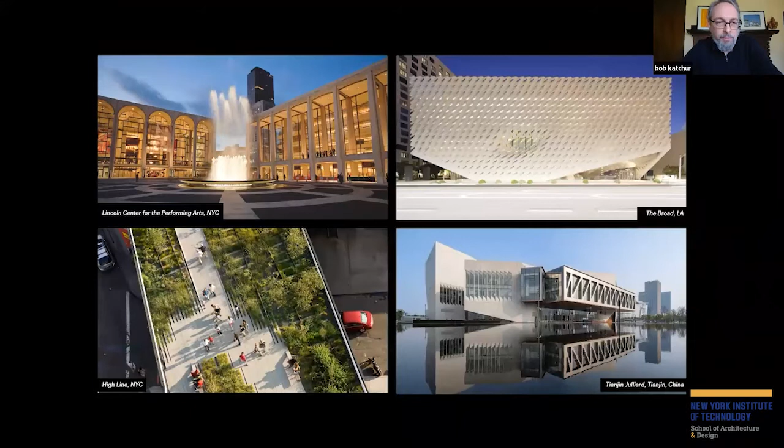We're the architects and design architects for the Lincoln Center for the Performing Arts redevelopment, the Broad, the High Line, and more recently we've expanded, working internationally, and there's a project there in Tianjin, Juilliard School, but even projects in Moscow and in Europe. There are our principals, our partners there.

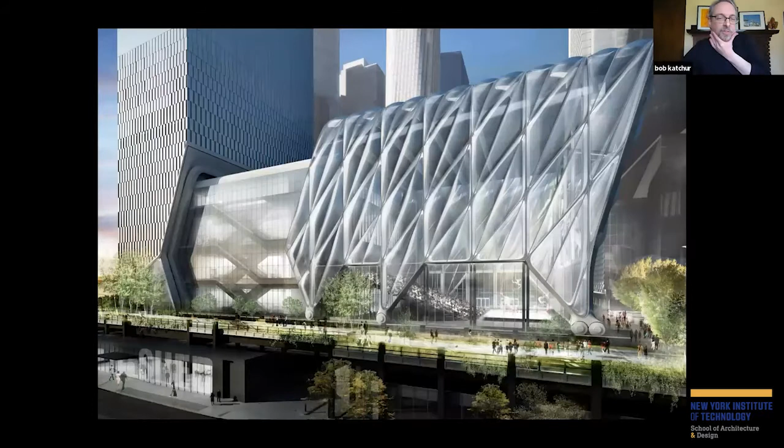So the Shed really began with the city, as they negotiated with the MTA and the future developers of Hudson Yards, they recognized a need to reserve space for a community center or cultural use. But they were able to secure a footprint that is effectively the size of what we call the fixed building. And in this presentation, I'll refer to this component in the middle here as the fixed building, the movable shed, and then the adjacent tower that ultimately we were, I'll call it, strongly encouraged to connect into.

So the city was able to secure this sort of 20,000 square foot footprint in the larger eastern rail yards. And it's situated in a very strategic position along the northern edge of the High Line, the Whitney Museum at the south and the Chelsea Arts District in between, and the expansion of the theater district into the far west side, the redevelopment of Javits and other projects over here really left the Shed in an important urban site.

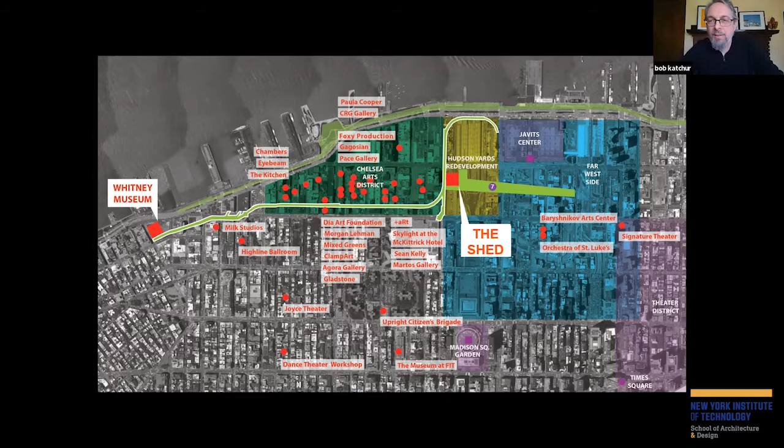I think the question the city had was, what should it be? There are over 1,200 cultural institutions in the city. Why do we need one more? What are we missing? What do we need? And ultimately, they put out an RFP answering those questions with some parameters. And I think they really expected to get folks like the Guggenheim or MoMA or the Whitney or the Met to respond with a team of architects and a proposal. But the economy was collapsing as that idea was put forth, in 2007 and 8. And those institutions were watching their endowments dwindle and their expansion ideas suffer.

In the meantime, Liz Diller and David Rockwell, Rockwell Group was our collaborator on this, thought about what do we need, what can we do? And they were sort of informed by a process that happened just after 9/11. There was an aching need to do something down there at the Ground Zero site, and they set about finding a way to create a ramp that would allow people to see the Ground Zero site. And there was no client. They sort of endeavored on it themselves, pulling resources from wherever they could, communicating with city officials and other supporters who might support it.

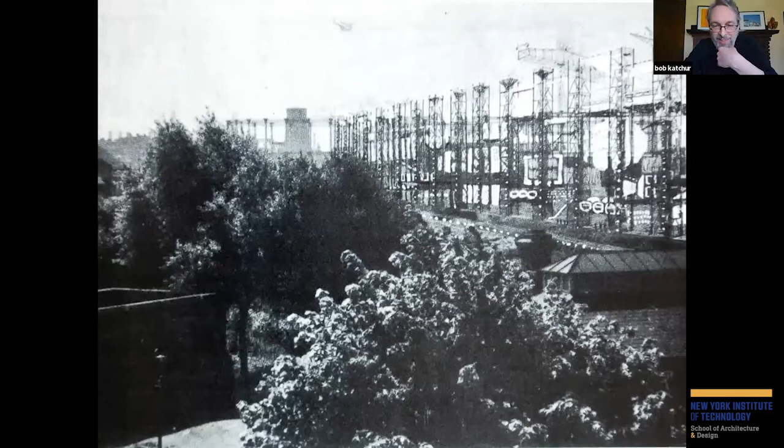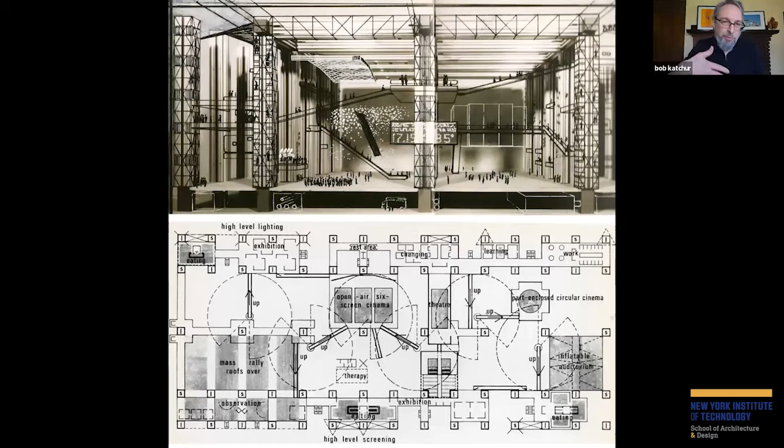And we knew that there was a significant movement toward multidisciplinary needs. Of those 1,200 institutions, very few of them actually try and merge the artistic silos that exist. So you mentioned Cedric Price. That was a clear example of creating an architecture of infrastructure that could be malleable to the needs. It was obviously never built, but it served as an inspiration, and I think it set off a trend in the cultural community with Pompidou and other institutions that attempted to make it good, make it real.

The site here at Hudson Yards, this is before the Eastern Rail Yards was decked over. You can see the train lines sort of expanding out into the Western Rail Yards here in the foreground, the High Line at the southern edge, and sort of a train shed building for maintenance and other things in the Eastern Rail Yards, all were there, and they all had to operate during the entire construction process. And ultimately, the Eastern Rail Yards as a construction project, in large part controlled by Related, was one of the largest construction projects in US history. 13 million square feet, and then some as you move north. It was several thousand workers on the site every day.

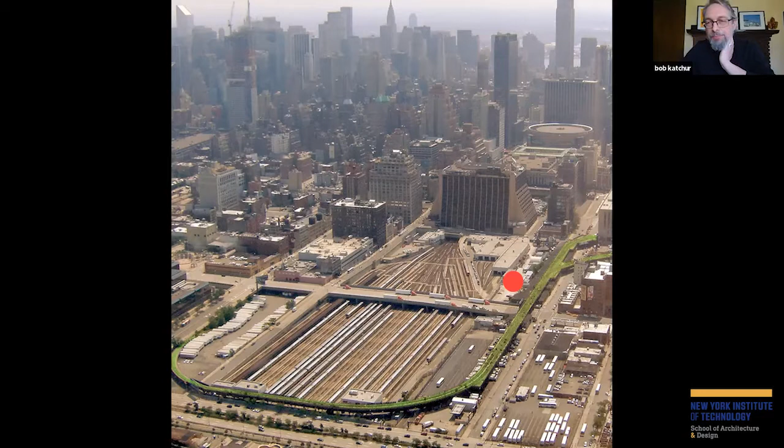So as they began to deck over the site, the Shed site is here on the right-hand side of the page. We had to act. We weren't necessarily in a position, we hadn't yet figured out who the Shed would be yet, but Related needed some definition. How much does this thing weigh? Where does it want to be? So we set about making some very early infrastructure decisions that we would have to live with as we move forward. And this is the whole of the Eastern Yards and the Western Yards, sort of on the lower left-hand corner.

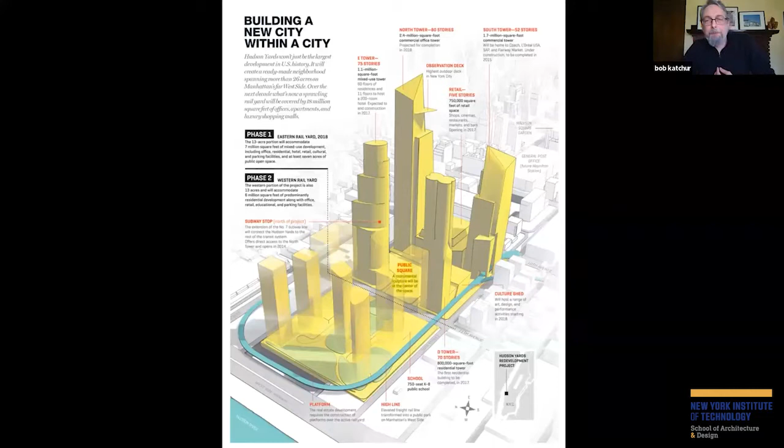And the way these things work, the alchemy between the MTA and New York City as the zoning regulator and Related, was that the city was really providing a series of amenities to the city, and Related and the MTA, as the landholder, were doing the commercial and residential development. So these things, the New York City subway line, the High Line, and the Shed, really added value to the whole neighborhood, but it was a way of humanizing this commercial development and making it for the public.

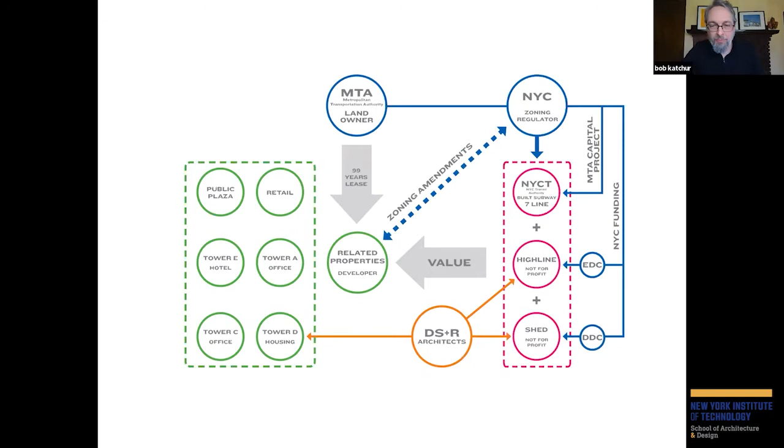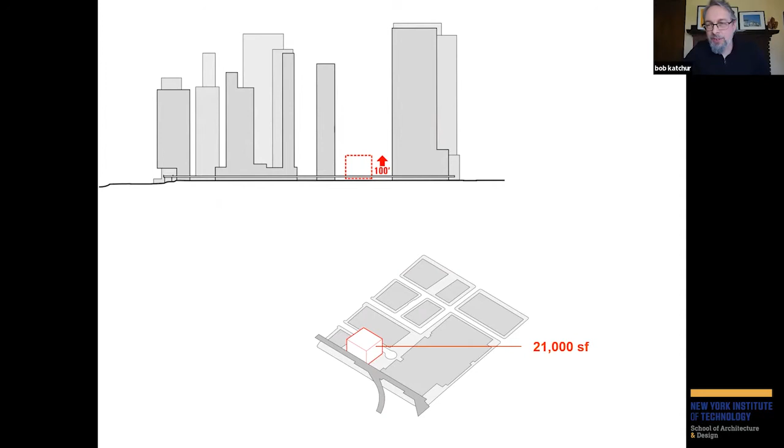So I mentioned the sort of 21,000 square foot footprint that was originally allocated with some sort of limit on the volume that it could be. It had a 200,000 square foot maximum square footage allowance in an agreement between the city and the MTA. So we set about creating multiple proposals, pitch books, and a business plan. Ultimately, we pitched it to the city, and Mayor Bloomberg said, "I really like this idea." We were slotted a 20-minute meeting, and we were there for an hour and a half. And he loved the idea very much, but he wanted it to balance its books. He wanted it to be a stable economic thing. So we set about creating that.

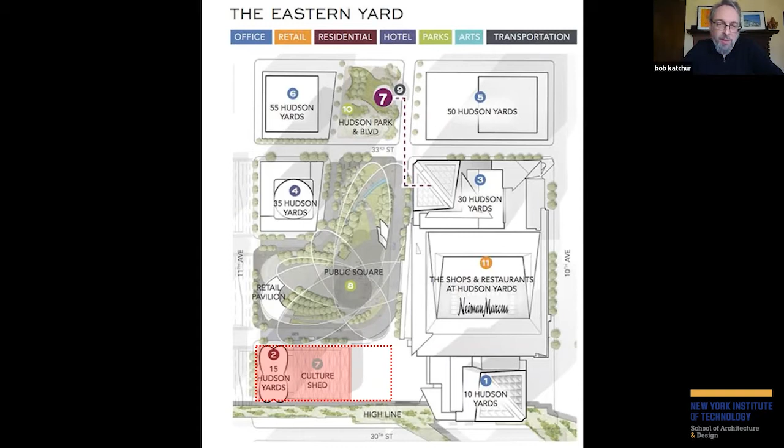We looked at ways we could develop cultural programming overlapping with income generating events so that the books could be balanced. And ultimately, a serious attempt to make sure that Hudson Yards at large had a connection to the Chelsea neighborhood. And that's why the entrance is on 30th Street and not up on the public space to the north. We wanted it to be part of the neighborhood.

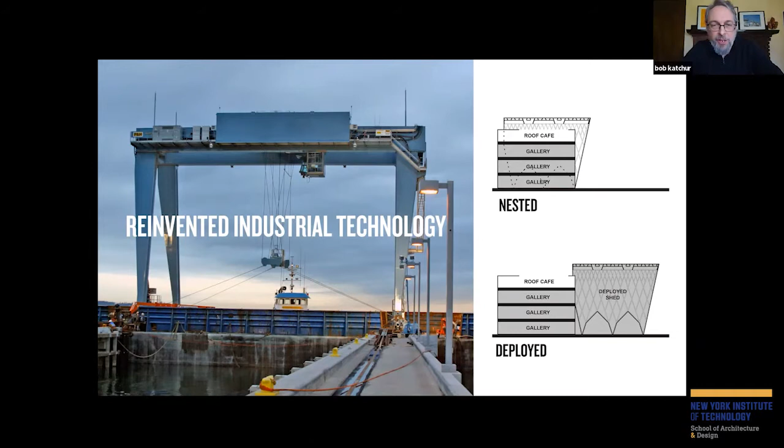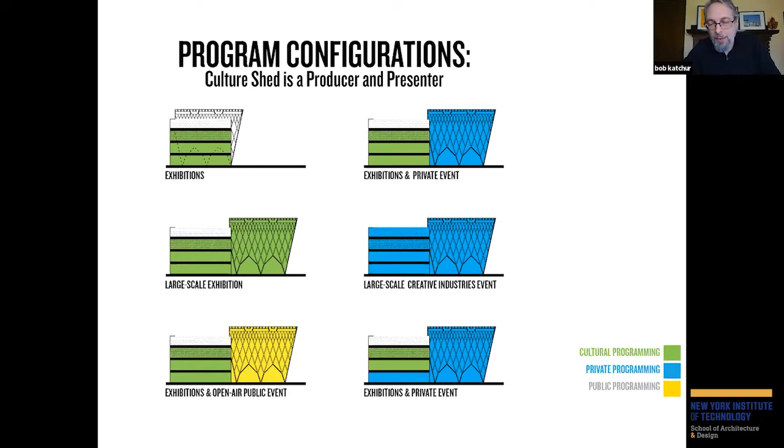So we use the terms nested and deployed. And as Tom mentioned, it's really based in a reinvented industrial technology. We wanted something that was entirely reliable, entirely understood, that it wasn't going to be a total invention, even though it's incredibly unique for a building to utilize this technology. And we envisioned different programming configurations that would allow these different cultural programming, private programming, and public programming. And different parts of the building could be taken over by any one of these programming configurations to make the income generating side of it be balanced out with the public mission.

So something I'll mention is the way it connects into the adjacent residential tower. Originally, it was designed with a 50-foot gap in between, but as the development matured, that building kept getting wider and bigger, and the positioning of everything began to get a little too close for comfort. And ultimately, we were faced with the decision, is it better to connect or not?

And one of the considerations was that this was a cultural institution on sovereign city land. It wasn't part of the development formally. It wasn't controlled by Related, and we didn't even want it to have that appearance. But there was a real benefit in how we approached this, that we could gain additional support space for it. And ultimately, it became a need to do that.

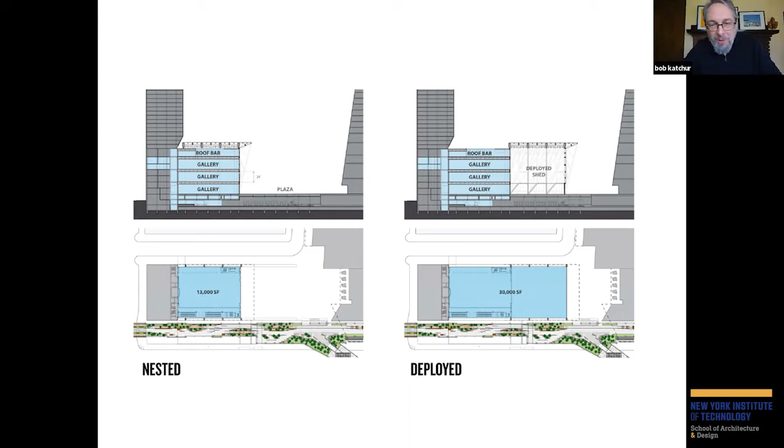And it really occupies the lower 10 floors of space. We were able to utilize that footprint, which was not desirable space from Related's perspective at the base of the building, to put all of the mechanicals for the shed, all of the dressing rooms, all of the public bathrooms, all of the things that allowed us to preserve the 21,000 square feet for public space.

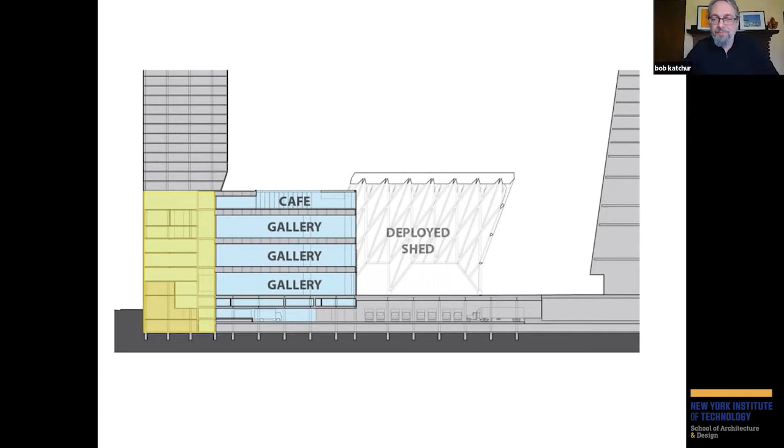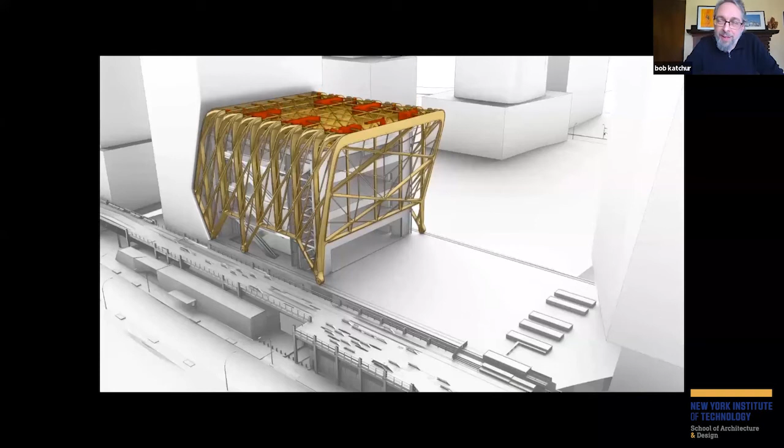So this is an animation that we assembled, and I'll show you the greening of the High Line, the taking over of the yards. The steel frame of the fixed building, which is on that 21,000 square foot footprint. The engagement of the tower. And then the steel structural frame of the movable shed itself, with a full mechanical system that allows us to climate control that room when it's deployed, and the ETFE skin.

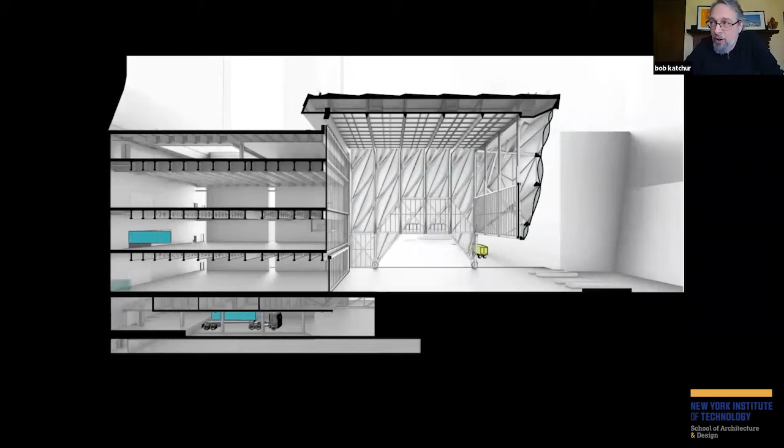So one of the things that was incredibly important for the project was the ease with which you can load in and load out. It often becomes a make or break moment for institutions. They spend a lot of money moving things around, and the easier that you can make it, the lower the cost of entry for a given theatrical or artistic company to put on a show there.

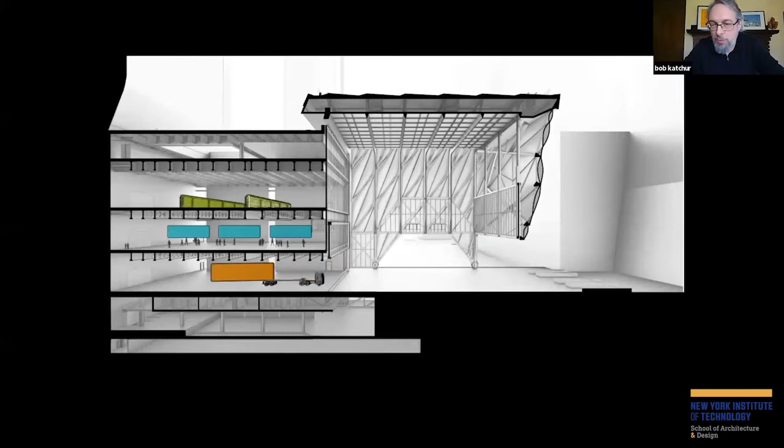And as the shed became real, and Poots came on board, and a board was developed to build the institution, Alex made a decision to produce all new work, which made these things all the more important on how you get things staged into the building and how much it costs to do it. So we have a variety of ways that goods and materials can be loaded into the building so that things can happen simultaneously.

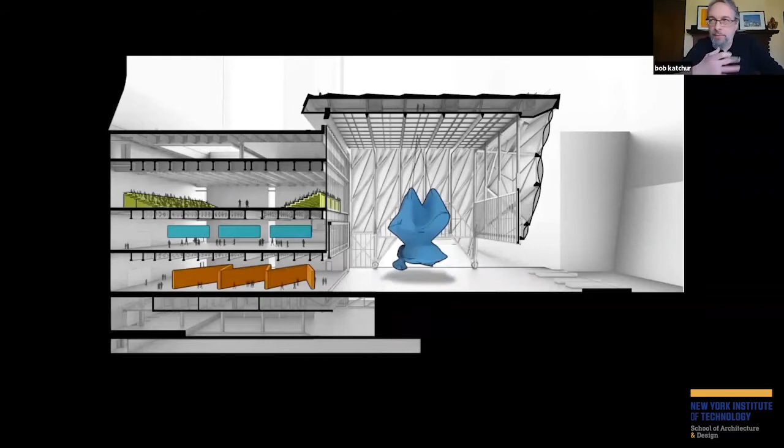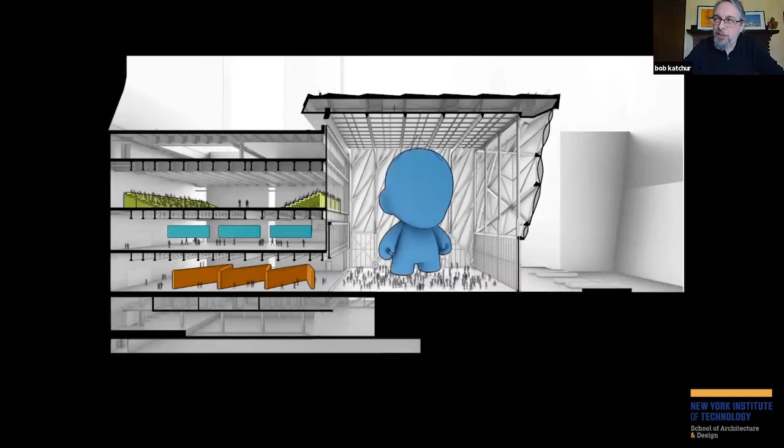We have a theatrical deck at the top of the building that allows you to easily rig whatever you need to in the main space. And we have a lot of automated systems that allow you to transform the building from one state to another.

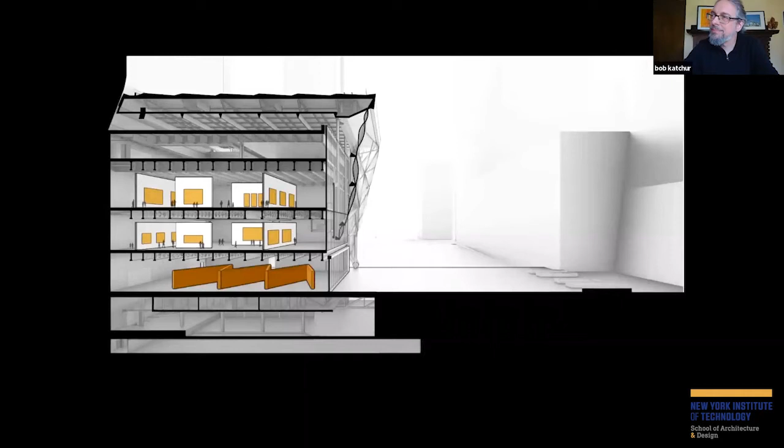I think, for the sake of time, I'm going to move on. I want to leave enough time to have a conversation. I thought I would mention, flexibility is key to the building's success, and we really viewed the architecture as one of infrastructure, offering what you would need 80% of the time with great ease.

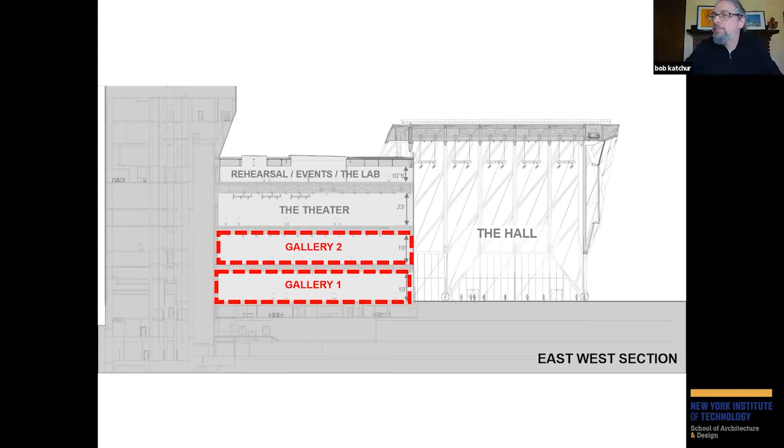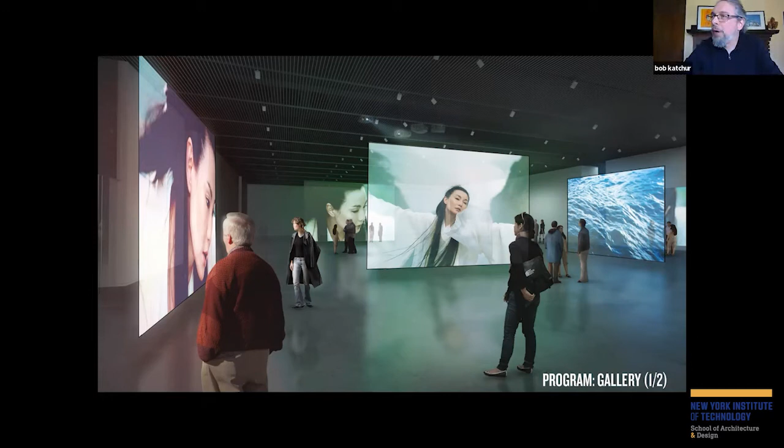So in the exhibition galleries, which were designed to be flexible between very light-filled modes and darkened room modes. This is the Reich Richter Pärt, which was the first show that the shed launched in its inaugural year. And it was a mix of music and painting and singing. And so the galleries are all very flexibly designed.

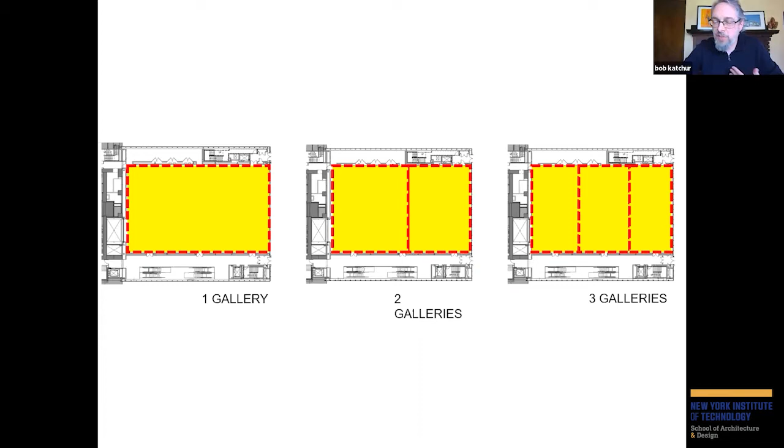You can demise them both mechanically and spatially into a series of smaller spaces so that you can create intimacy where you need to create intimacy. There's distributed power in the floor and in the ceiling. The walls can carry 440 pounds of weight around the perimeter. And there's anchors in the floor every 10 feet to permit any number of arrangements of walls that you might want to create for a given show.

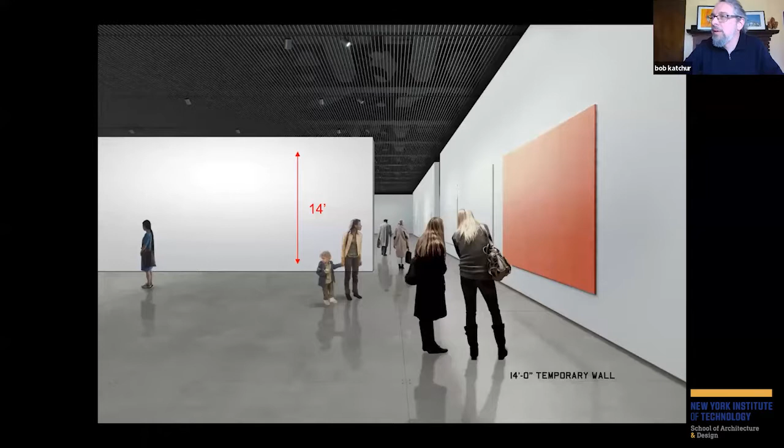And those anchors are strong enough to support cantilevered walls that are thin in nature, between 14 and 18 feet tall, and still meet code and carry the art on them as needed. And indeed, the shed has done all of those things in the years since it's been opened. That was from the Agnes Denes show.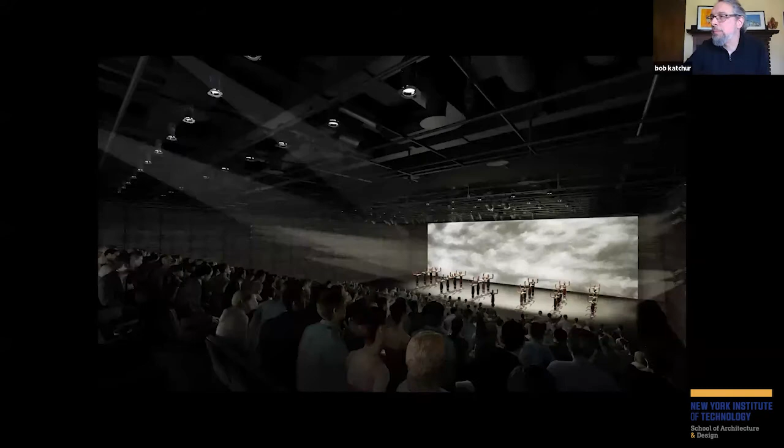The theater up on level 6 is a black box theater that can have 500 seats in an arrangement facing a singular stage, or it can be set up into 2 separate rooms that have smaller, more intimate arrangements.

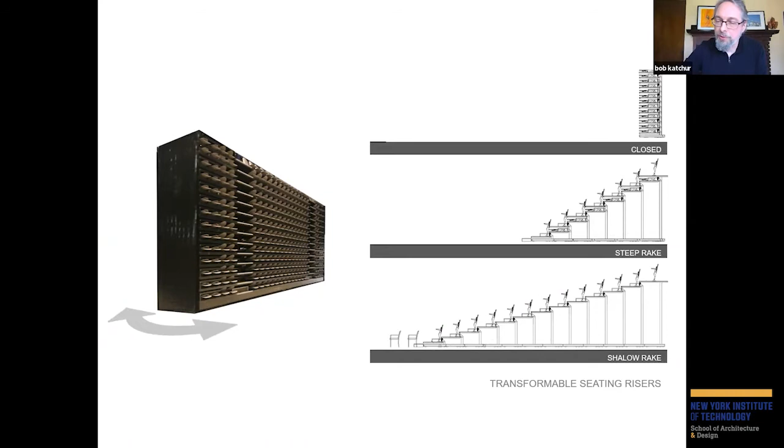And the shed has got a series of flexible seating wagons that can be stored within the base of the tower, that can, when they're closed, roll down a hallway, and then alternatively create steep rakes or shallow rakes. And here's the 500 seat arrangement.

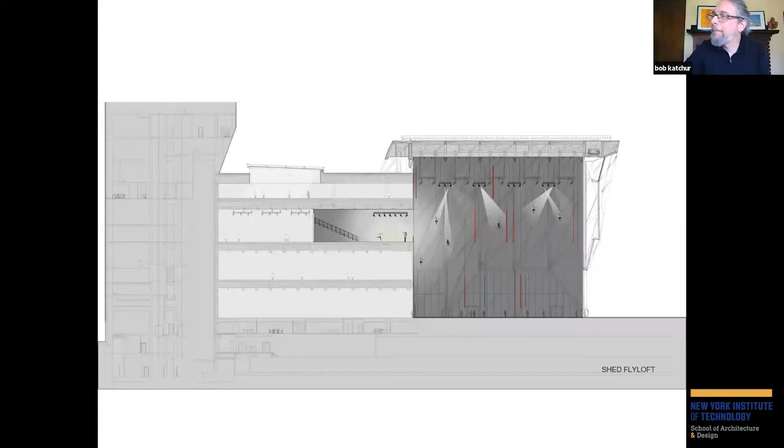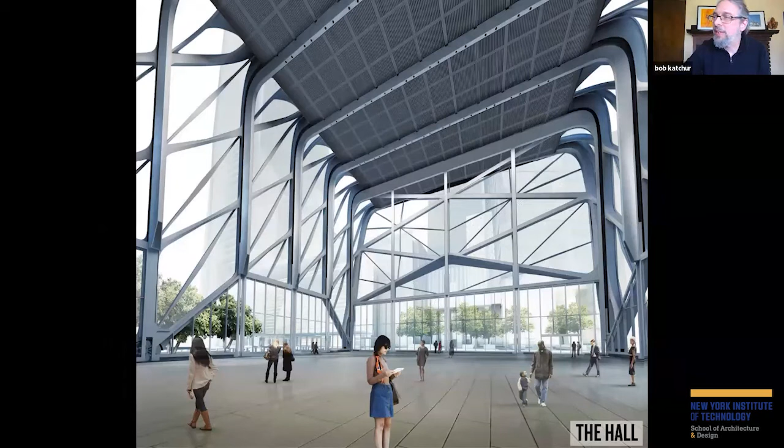And each of these spaces has been designed to connect into the main space. So you could have a show where, you know, you're in the black box theater, but you use the McCourt as a deep well of space. The McCourt itself is about 115 feet tall inside, with that theatrical grid above. We envisioned it serving a variety of purposes. The frame itself is sort of, we like to call it all muscle, no fat.

These are the air delivery systems, the ductwork coming down. It's married up, it's constructed out of steel the same way that the structure is. And it allows air to be delivered down low in the space, and the rigging systems are all up high in the space. So there's space up there to maneuver around chain motors and hoists and theatrical flies as you need to. The floor is loaded with power and data and convenience power, as well as loading capacity.

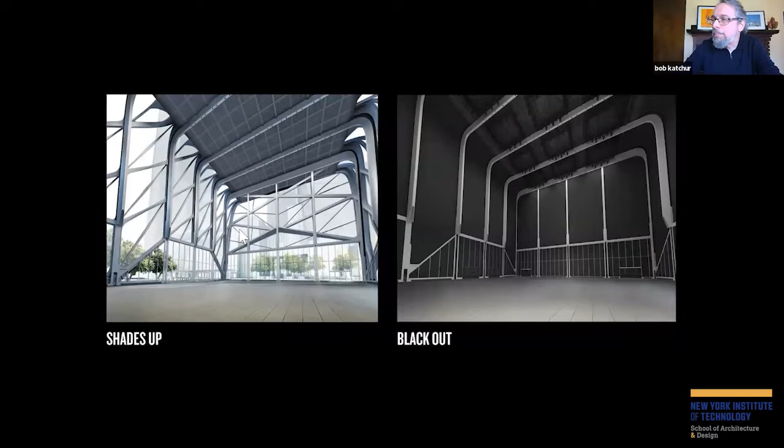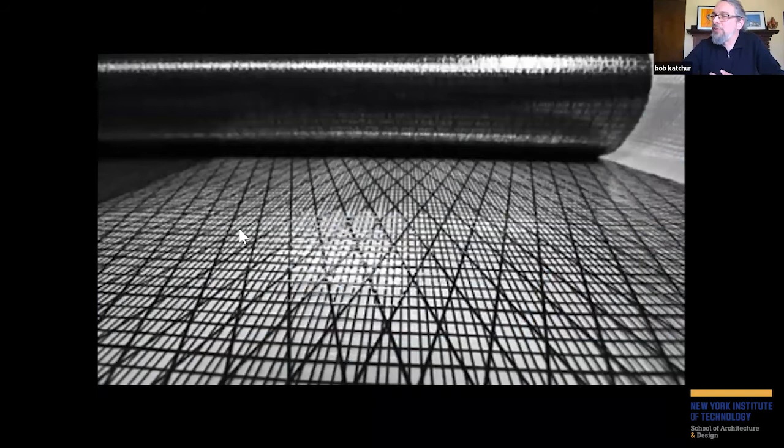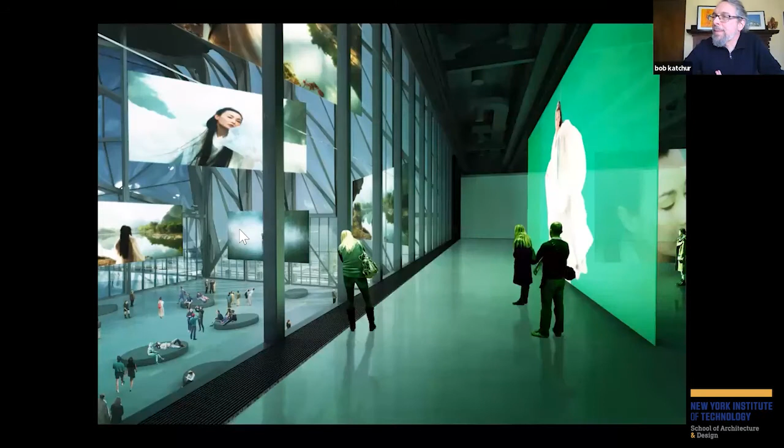And then the room can be blacked out with a robust heavy shade system that blocks out light and sound. It's based on a sailing system that's used to unfurl large format sailboats with a carbon fiber sail material, which is loaded with weight and which can control and isolate sound. And then the way we connect the fixed building and the McCourt, allowing for an interaction between those different spaces.

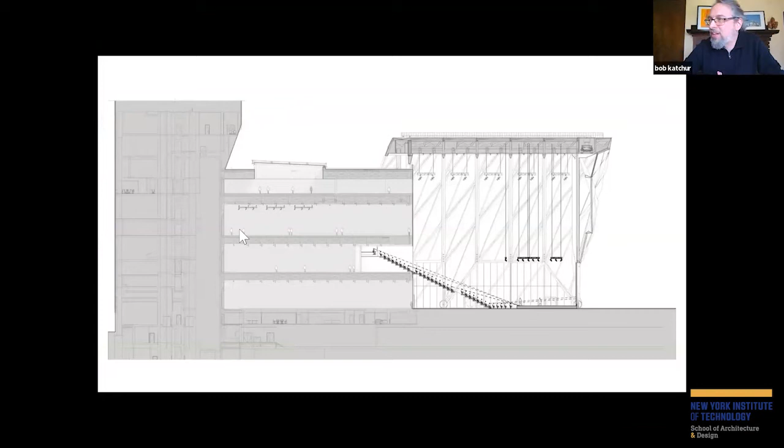So, Fashion Week was a primary driver in the considerations in the Shed, and they often have overlooks and booths and party rooms that overlook the shows down below. So a variety of different seating arrangements can be installed. You can create a balcony on the second level gallery, or you can create an event with a standing room only sort of floor space.

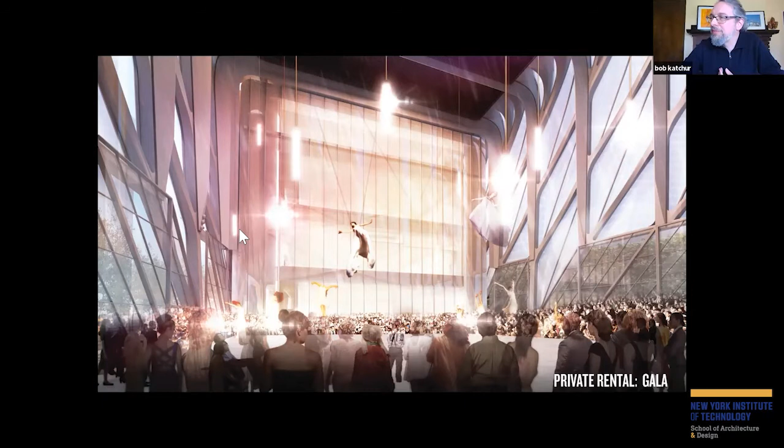And this was the opening show called Soundtrack of America. The second show was Björk, and there was a Chinese opera that took advantage of the space and flew people high up into the room.

So I see that I'm probably 20 minutes in. Tom, why don't you tell me, I've got some technical material, but we can... Absolutely fine. Please take the time. You want me to keep going? Please take the time. Okay. Yeah, sure. Okay. Thanks.

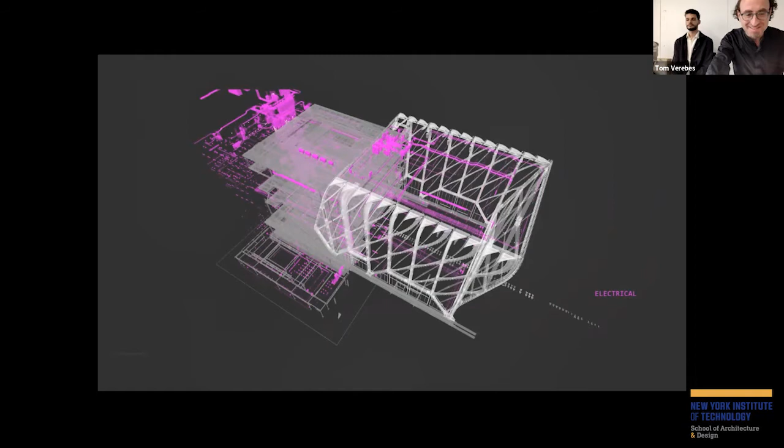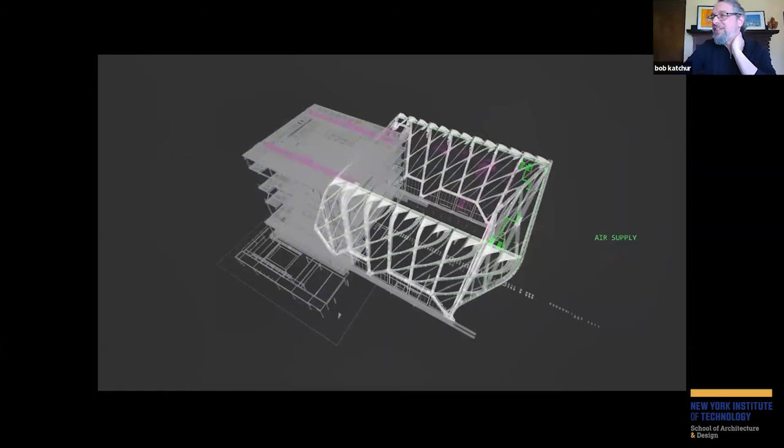So when we think about the infrastructure, we did this animation that sort of overlaid all of the different systems, rudimentary systems as well as sophisticated ones, the plumbing, the electrical, the mechanical, the air distribution for the facade systems, the ETFE, the kinetic systems, and then all the things that really control all of those. The degree of coordination and getting all of that stuff to synchronize and work together was maybe one of the hardest parts of the project.

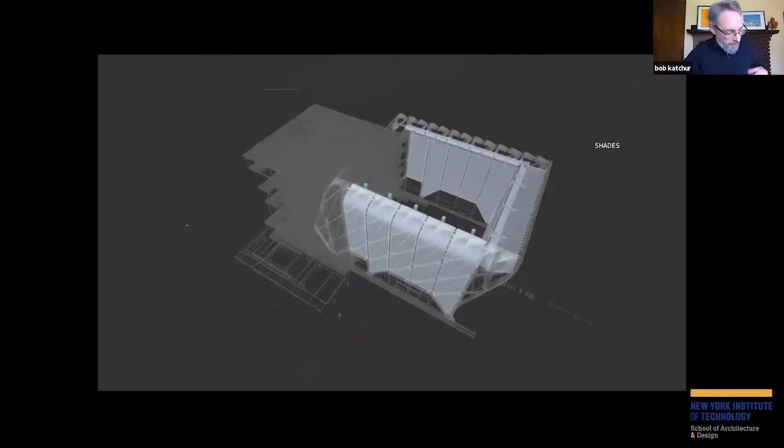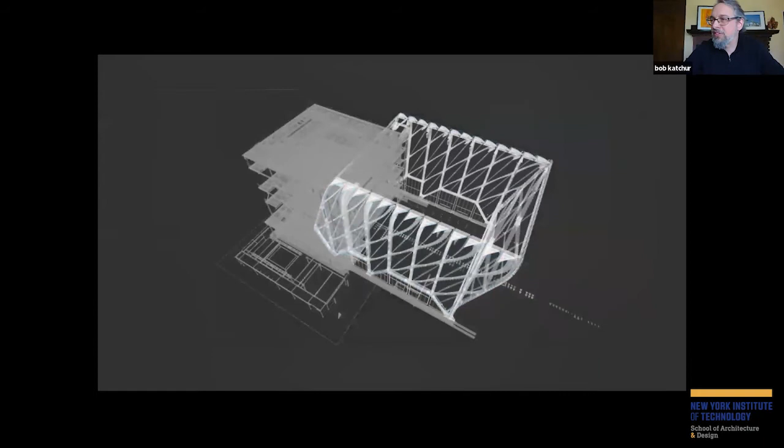And the project has a lot of programmatic aspirations, but I would say that equally difficult in execution was making sure that all of these systems came together technically to live amongst one another and be there when the artists need them. Because the end goal of all of this is to make it easy and accommodating to any artistic vision that people want to put into the building.

So when we undertook these designs, the geometry of the Shed arises out of these analyses of the structural needs. When you have a movable building that has to be entirely open on one side, looking at the lateral forces, the longitudinal forces, the gravity forces, the diagrid that is the structural expression is a response to that. And the diagrid allows all the structure to remain incredibly light, which is extraordinarily important to keeping the kinetic systems under control.

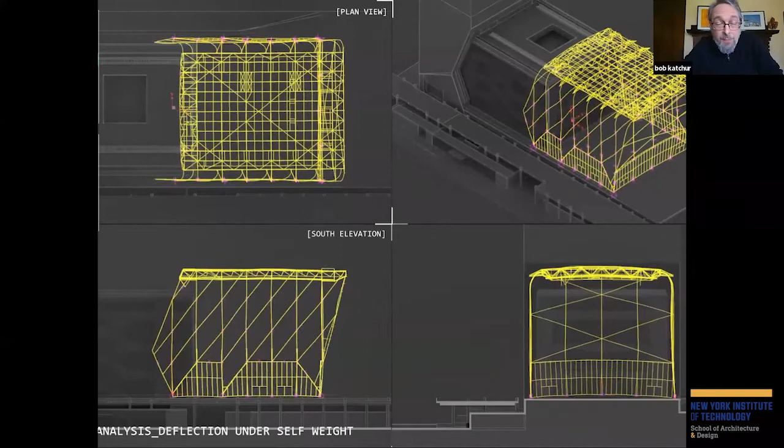The entire system is moved by about 180 horsepower of electric motors, simple electric motors. A Prius is about 160, 165 horsepower. So we're moving an 8 million pound building fully loaded with all the theatrical gear that they might put in it with an engine slightly bigger than a Prius.

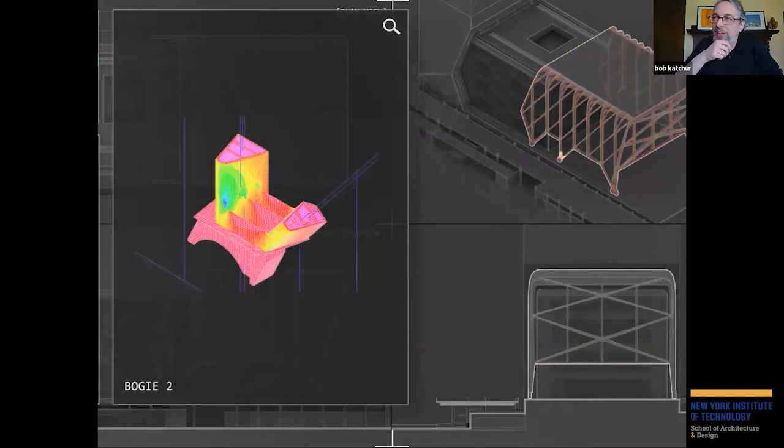So we assembled, with the help of Thornton Tomasetti, who are our structural engineers, and JB&B, our MEP engineers, some analytics that we put on display in a gallery opening in Germany a few years ago. So these are images from that presentation.

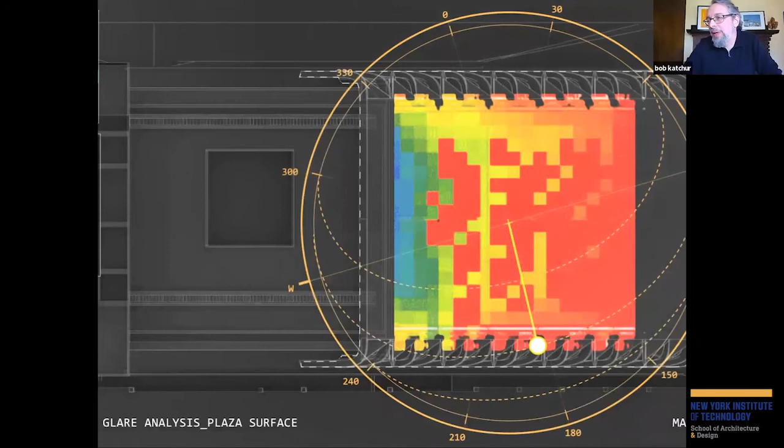And of course, life safety were big concerns as well. We looked at glare analyses, making sure that art could be displayed in the room comfortably. That influenced the frit selection on the ETFE itself. We wanted to soften the light, not let harsh sunlight come in.

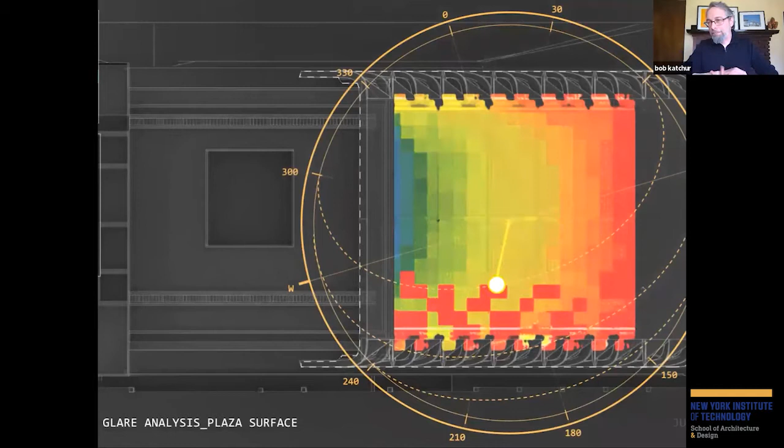We looked at, we'll let this play for just a second here and see if we can maybe move it along. This was an air distribution analysis that we did to make sure that we were conditioning the space down low, but not spending too much energy conditioning space where people couldn't be, up high in the space.

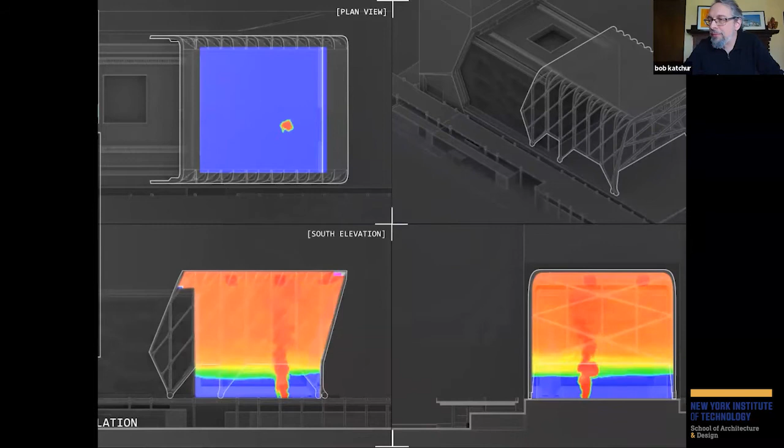And then, of course, life safety. If a fire happens in here, if they bring in a tractor trailer's worth of gear and something goes wrong, what happens? So, there's enough smoke evacuation in here to maintain a safe level of fresh air at the bottom of the room if something bad were to occur.

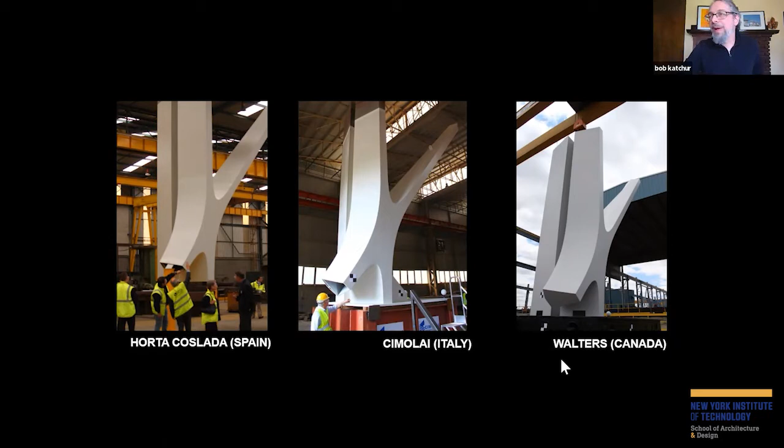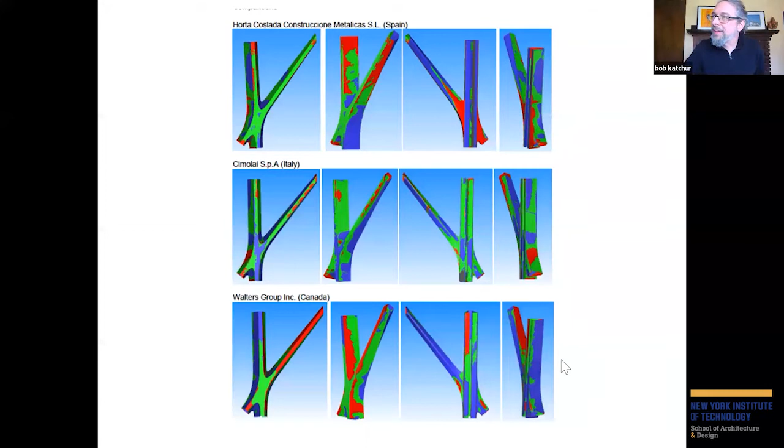So we set about making sure that we got the best steel contractors in the world because we knew how important the expression of the steel was. We asked them to do mock-ups in 3 different countries, in Canada, Italy, and in Spain. Ultimately, the Italians won. We analyzed each of them for deviations against the theoretical model. And the Italians did a terrific job; the company's named Cimolai, and they set about the project.

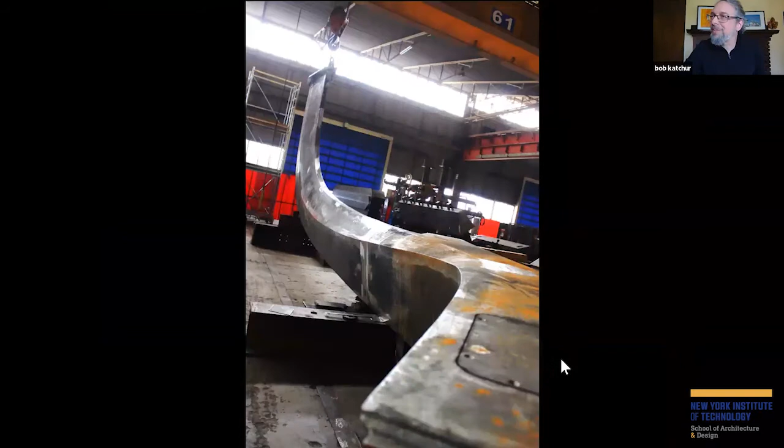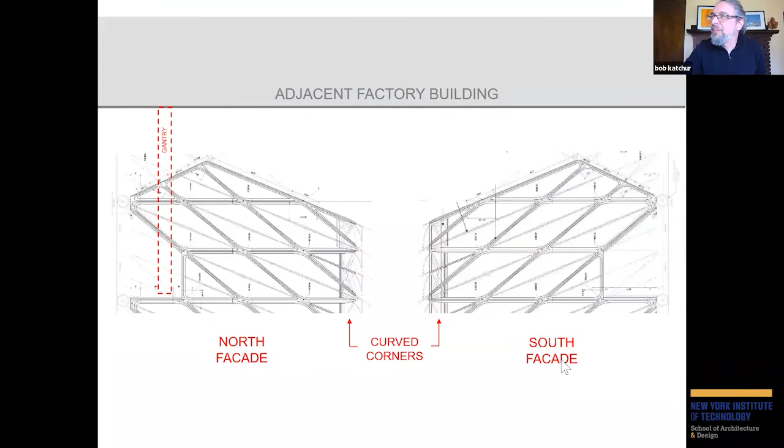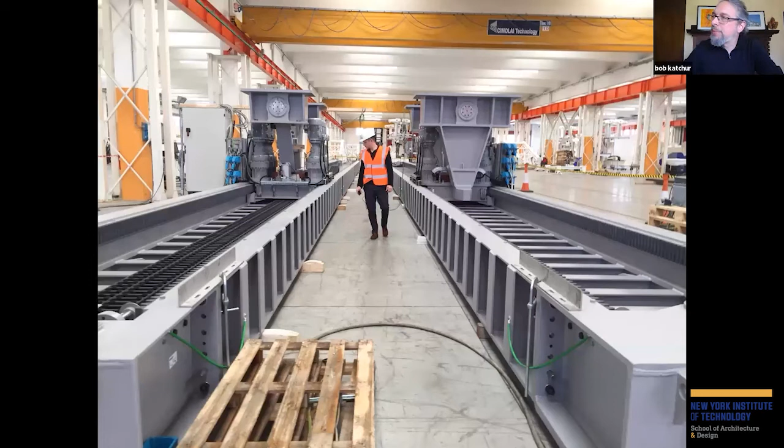And the kinetic systems, they also undertook the kinetic systems, which was really beneficial because the two needed to be in sync, the structure and the kinetic systems. And the way it works is these electric motors are on the roof of the fixed building, out of sight, out of touch. And it just drives along a rack and pinion system. And the wheels at the bottom are simple, dumb wheels. It's a little bit like a shopping cart where the motive force is up high and the wheels at the bottom just spin. These are the motors at the top, and they're now mounted on the fixed building roof.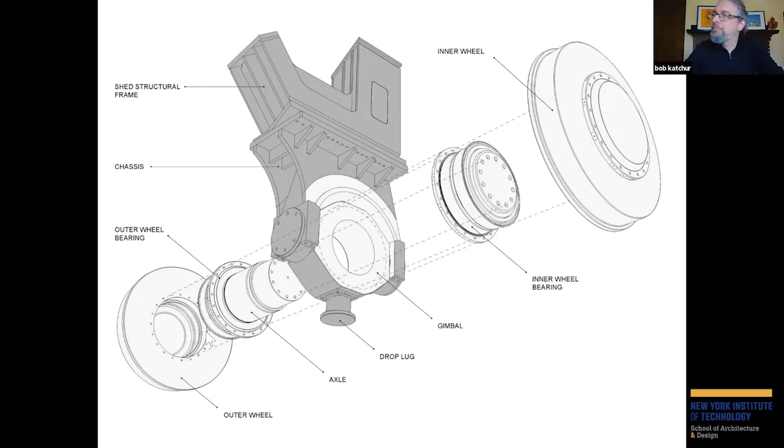Each of these motors are 15 horsepower motors. There's 12 of them. And that's the wheel. It has a special tapered bearing system in the center to reduce all friction. And that's what allows these motors to be so light gauge. So you have a bearing, you have an inner wheel and an outer wheel and an axle that was friction fit into the gimbal that connected to the structural frame. They superheated the gimbal and they super cooled the axle, slipped them together and allowed them to come back to temp.

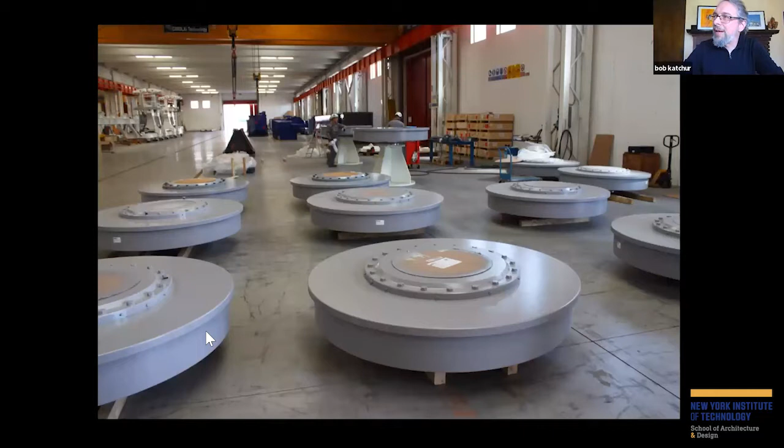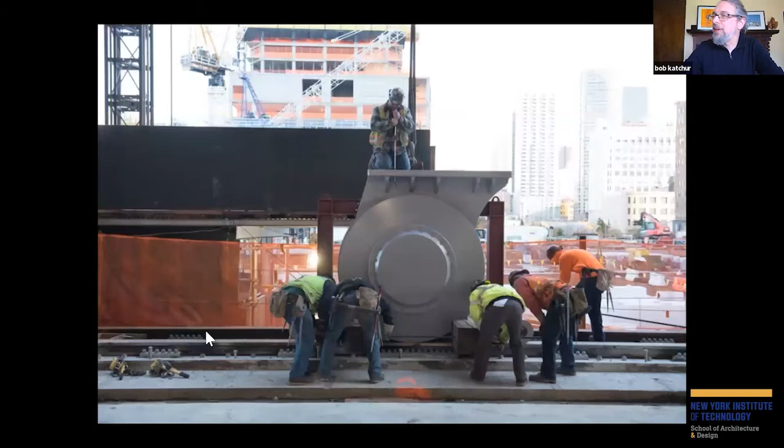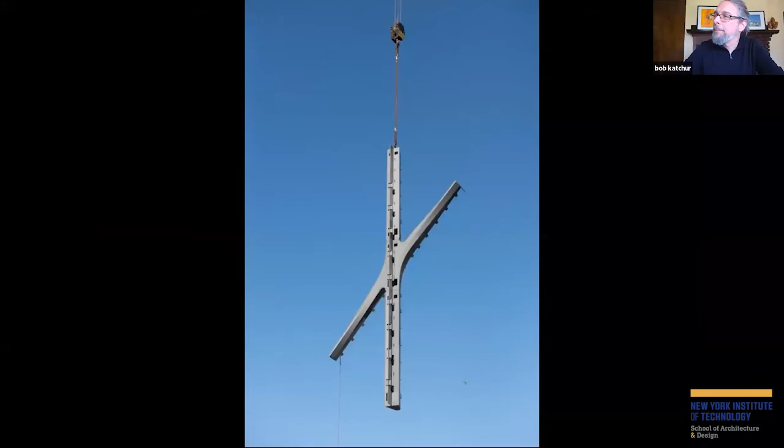I'm going to move through these very quickly, but it was pretty thrilling to see these pieces come together in the field. And now that it's all covered with ETFE, it's hard to imagine what it was. It was all staged against the fixed building. We used the fixed building as the scaffold structure to support the shed erection. The riggers had to figure out how to tip and fly these X-shaped pieces, and then they would just simply bolt together. And the bolts are internalized into the system so that you don't see them.

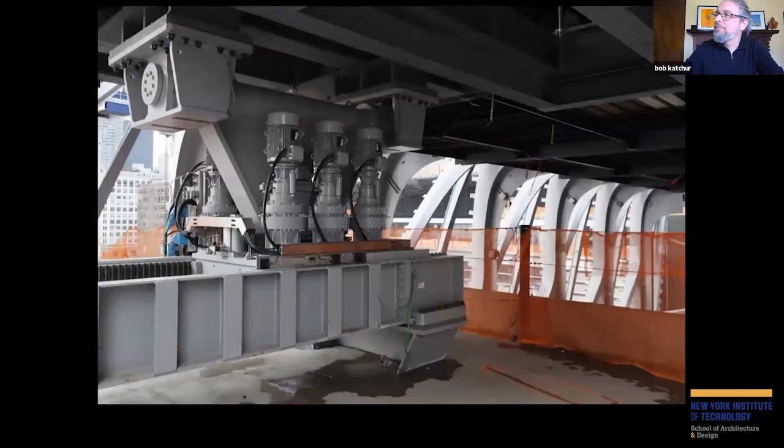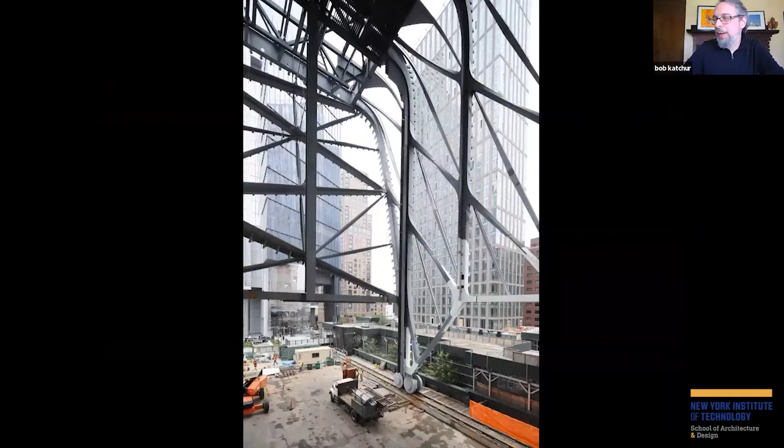There are the motors. And eventually they connected it across the top. And then they began to build the eastern edge, which included the double bogies, which weigh about 50 tons. That's a single bogie, which is about 25 tons. We had a party when we rolled it the first time, and this was just after it was deployed. You can see there's about 700 people packed in that adjacent plaza.

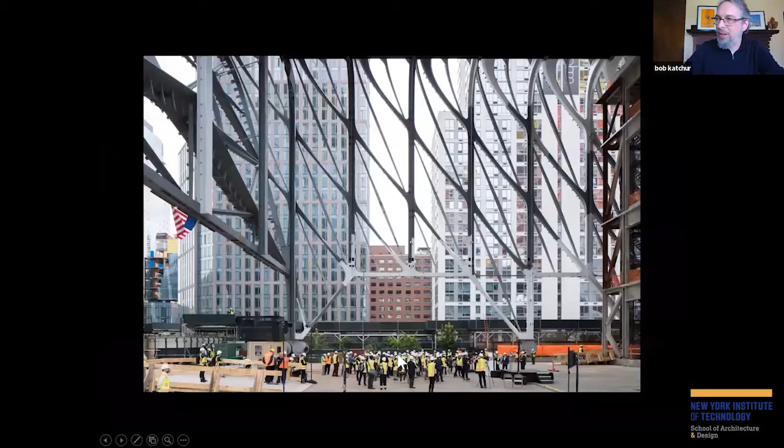And then the ETFE, which was integral to the success of the design because it is 1/100th the weight of glass. It's inflated. It has a long track record now going on over 50 years. Some of the oldest projects are still intact and holding up. It's an extruded resin, a chemical that is related to Teflon. Its thermal performance is similar to insulated glass, but it's ultra lightweight. It weighs 1/100th the weight of glass, and it's flexible.

So when you consider a moving building, if we thought about the weight of the glass, the weight of the steel that would hold the glass, and the joints that you would have to put between those panels of glass, it would have changed the very nature of the structure dramatically. It's hard to estimate against something you didn't do, but we estimate that we probably saved 25 to 30% of the overall steel weight by choosing ETFE.

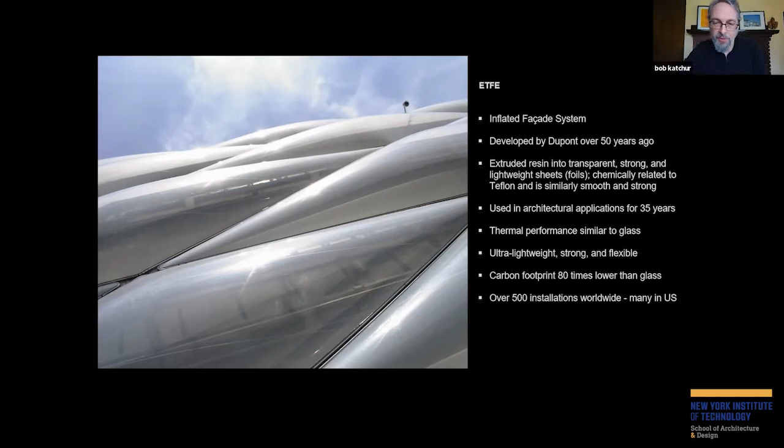It was produced by Vector Foiltec in Bremen, Germany. And in these cases, there's a center foil, and in some cases, there's two outer foils, or in some cases, just a single outer foil. So it's a two-chamber system that is inflated and balanced. These are the extrusions that we were considering for capturing them. They come as uninflated plastic foils. They get clipped into these aluminum extrusions, and then they get inflated.

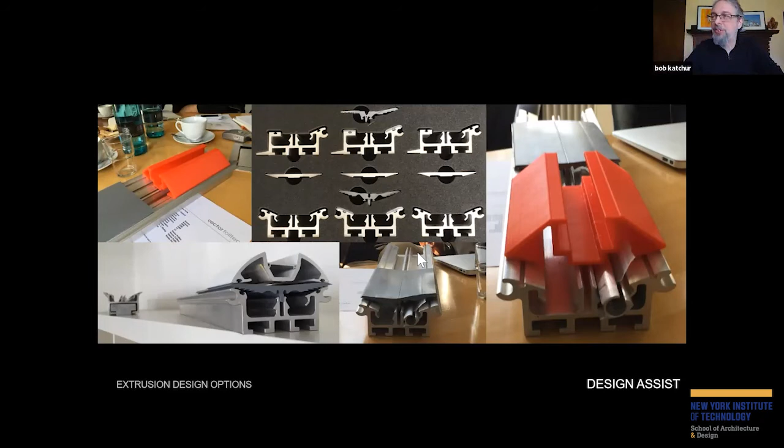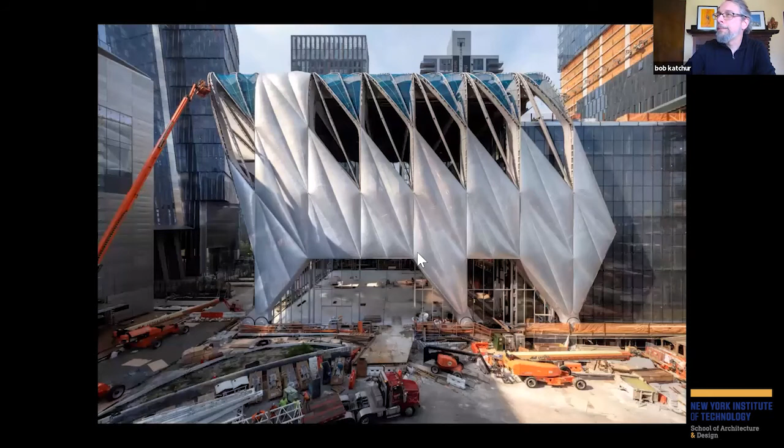There it is in progress. The brave Vector Foiltec installers. The ones at the top, the curved ones, were probably the most complex, trying to figure out how to bend a balloon over itself functionally.

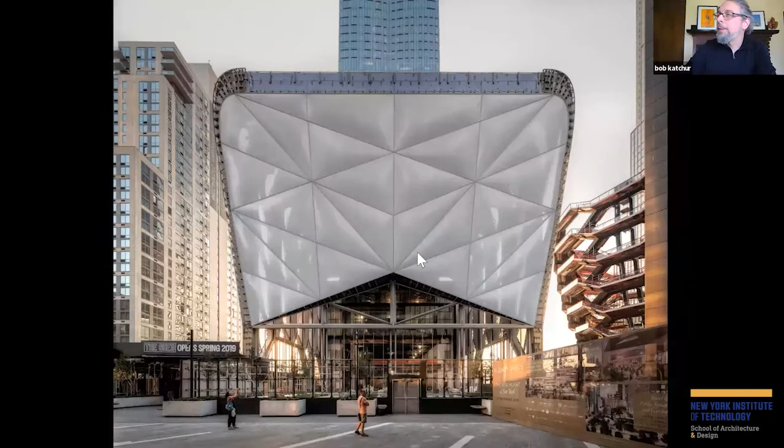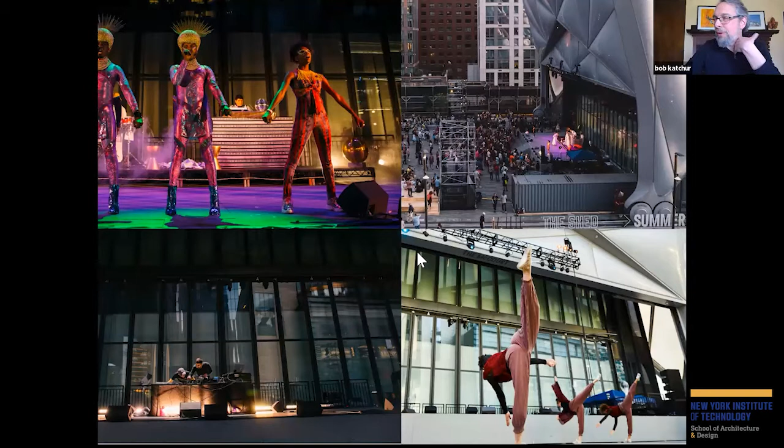So the shows, the Bjork show and the Chinese opera, they host food trucks sometimes, and they open it to the public at large. We've hosted the Frieze Art Fair in recent years. Nested, they used it nested over the summers mostly when they can enjoy the weather. And we were proud to host the New York Philharmonic in its inaugural concert after the pandemic, the first concert they were able to host. And because of the shed's flexibility, we could have all the social distancing that they needed.

So I'm sorry I went over my time, but I hope I made it efficient enough. Thank you so much, Robert. There's so much you presented that is either not visible when one visits the shed or in the various publications. So your presentation is really invaluable to our students here and really to the public to present the project in all of its conceptual and intellectual ambitions and technical achievements as well.

I'll pass the screen and microphone over to Daniel Beecher and Kyle Codispoti, who will conduct the interview. So part B. Shall I stop sharing? Sure. Hi, how are you? My name is Kyle Codispoti, and my partner's name is Daniel Beecher, and we would like to thank you for the fantastic slides that you presented. It was an honor researching the shed. It was really interesting, and it was great to hear your take on the project. So we learned a lot. But without further ado, I'm going to slide this over to Daniel, and he's going to start with the first question. Hi, how are you guys? So I'll just start off with question number one.